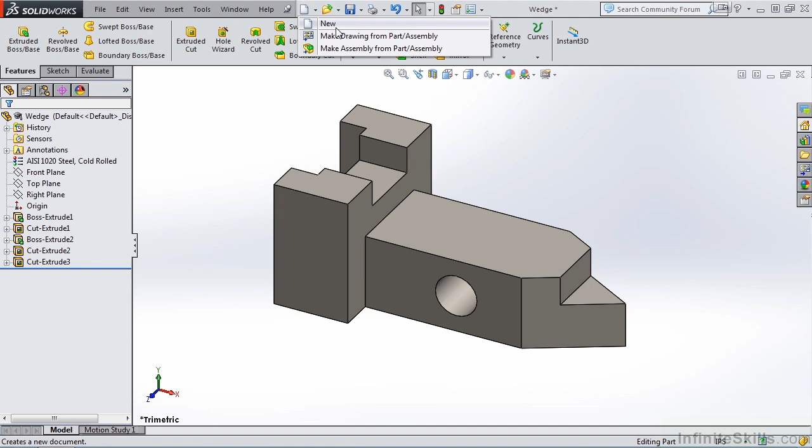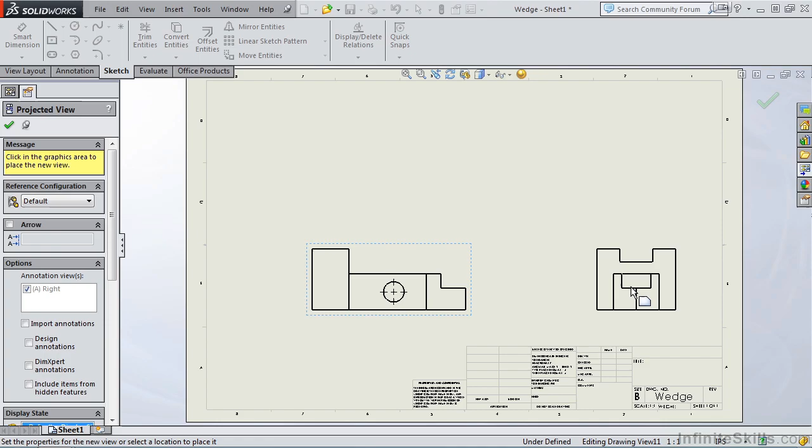I'll select the drop down next to New, Make Drawing from Part. We'll go with the same sheet size as in the previous lesson, and once again change the units to IPS. Just like the last lesson, I'll insert my front view. I'll place the front view, right-hand side view, and top view. Now I'm ready to insert driven dimensions.

Driven dimensions are also found in the annotation ribbon, where model items is used for driving dimensions. Smart dimensions are used for driven dimensions. However, if I check the drop down below smart dimension, notice all of the different types of driven dimensions we can apply. Really nice, a lot of options here. I am going to simply select smart dimension.

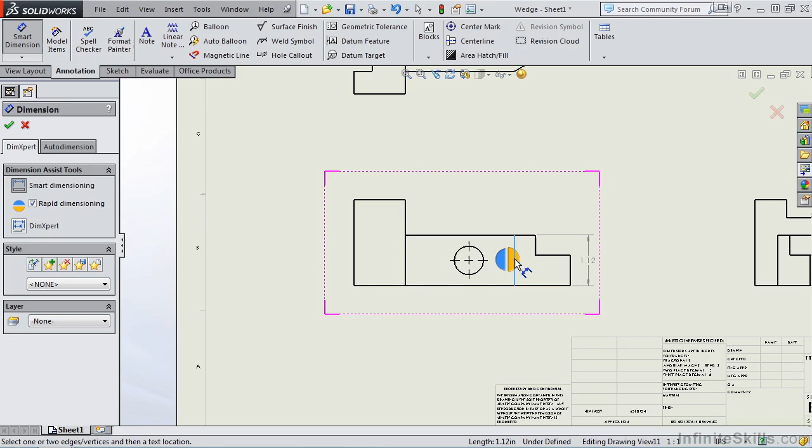I'll go out to the screen, and I am going to select this line right here. And notice it gives me a preview of 1.12 inches. Also notice I have a circle on the screen. We call this circle a manipulator. If I have my cursor on the right side of the circle, the dimension is placed to the right of the view. If I move the cursor to the left side of the circle, the dimension is placed to the left of the view. So that manipulator is very handy.

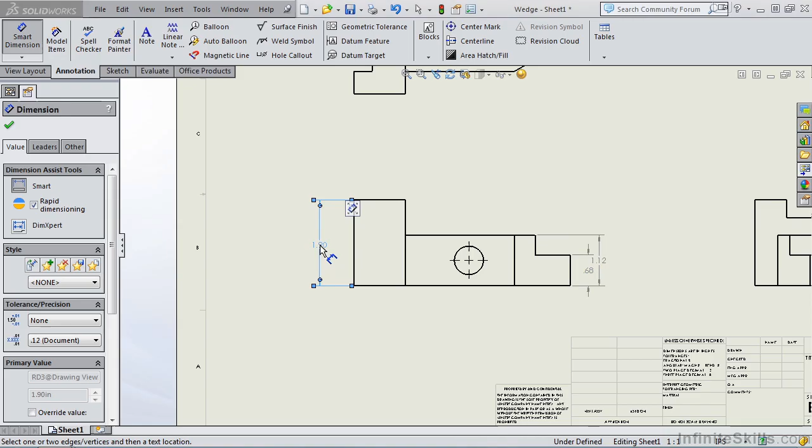Let me go ahead and dimension this feature. And notice how it moves the larger 1.12 dimension to the outside, so we do not have crossing extension lines and dimension lines. Now let's say, for example, you don't like where it's placed. You can simply move your cursor away from the manipulator, and then you're free to place that dimension anywhere on the screen. Now, if we dimension a circle, notice the manipulator is 4 quadrants instead of 2. And that's because we have 4 possibilities for the location of that dimension.

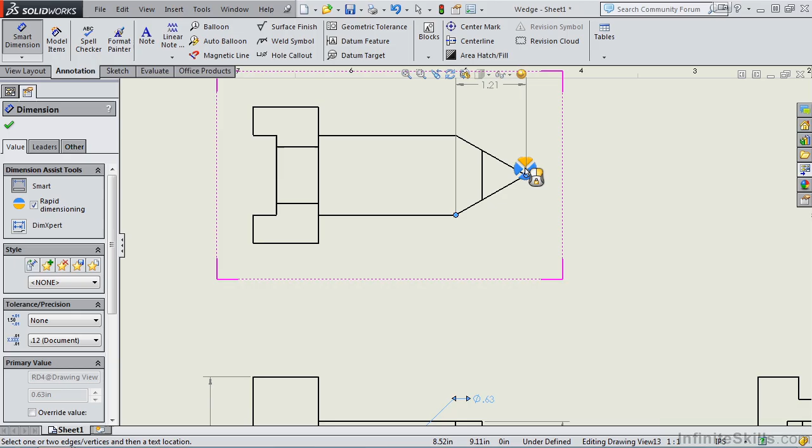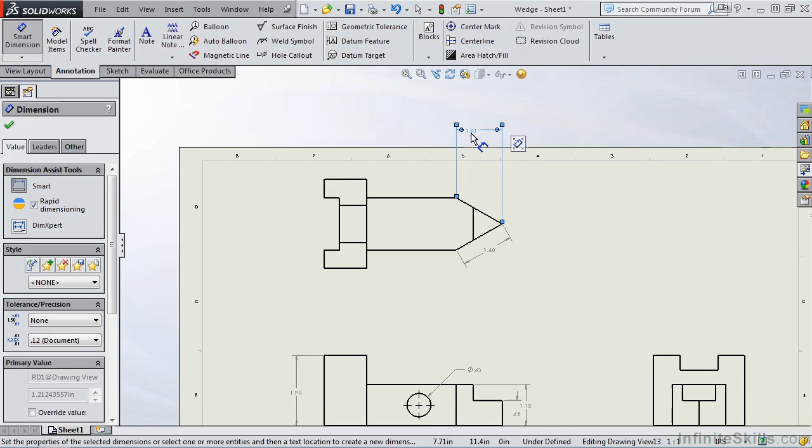Let's go up to the top view and select the 2 endpoints that make up this angled surface. I'll select this point and this point. And notice once again, the manipulator is broken into 4 pieces. The top and bottom will give you a horizontal dimension, where the left and right will give you a vertical dimension. If you wanted the true length of this line, then you would have selected the line instead of the 2 endpoints. I'm going to place it right here. That's a good clean location. And grab this, reposition it, and then pull the dimension back down in the view.

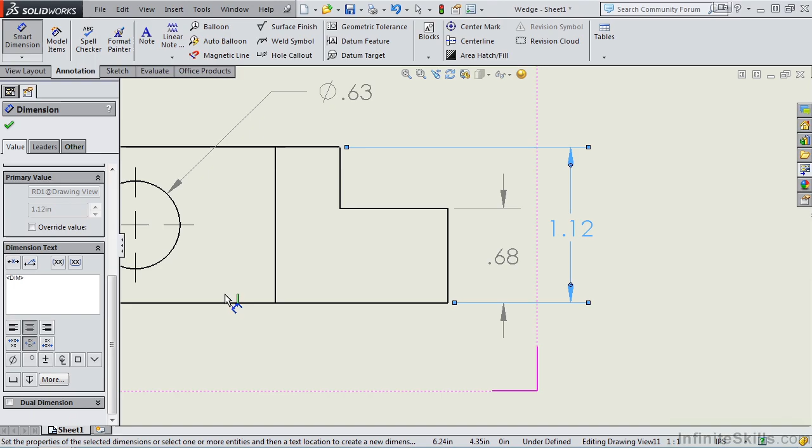Let's go back to the front view. I am going to move this 1.12 dimension to the right a little bit. Now when you select the dimension, notice, just like driving dimensions, you can click the arrows and the dimension will flip. And you also have the same options that you have with driving dimensions. You can add tolerances, prefix, suffix, and common dimensioning symbols. Let's go ahead and close out of the property manager and fit this to the screen.

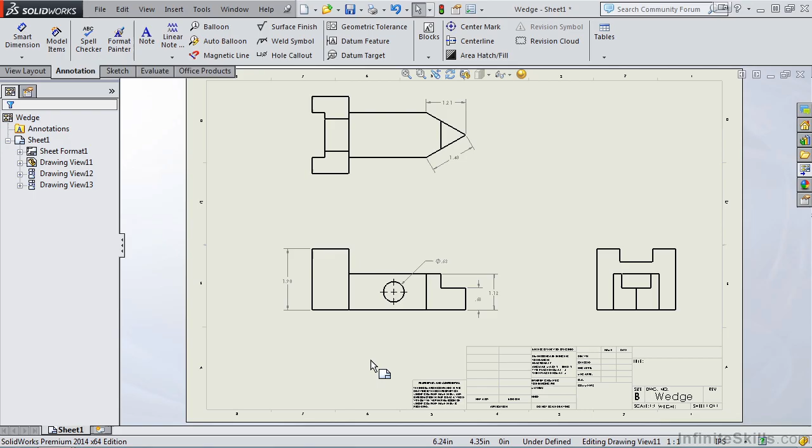That's a good overview of driven dimensions. A lot of people like driven dimensions over driving dimensions because with driven dimensions, you have more control over how they're placed in the screen. So you need to decide, when you look at a lesson for driving dimensions and driven dimensions, what method seems best for you. I know a lot of people strictly use driving dimensions, while other people only use driven dimensions. But I also know another school of people that choose to use both in the same drawing sheet. So there's no right or wrong, it just depends on what you feel is most efficient and what works best for you.